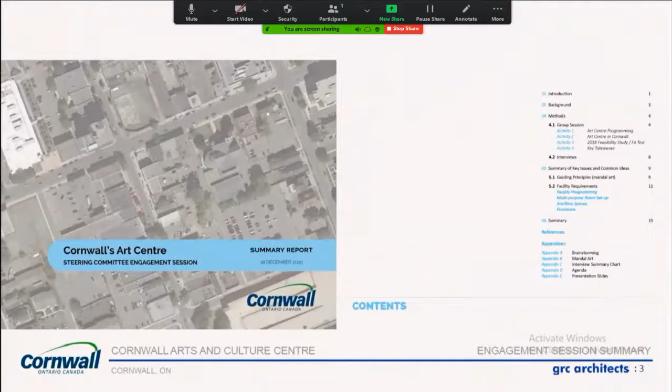So in December, our design team brought together the 12 members of the steering committee in a virtual engagement session to solicit feedback on the conceptual designs previously prepared and to establish a prioritized list of desired amenities. This feedback was collected in a report and informs the current program for the Arts and Culture Centre.

The group also contributed through an unstructured brainstorming activity that generated a comprehensive list of functions which the new center might be able to support. Then a series of small group interviews were held to help inform the requirements for each of these functions, the building requirements to support these functions.

The session concluded by asking participants to each list 3 key takeaways for the design team that will contribute to the success of the new Art Center.

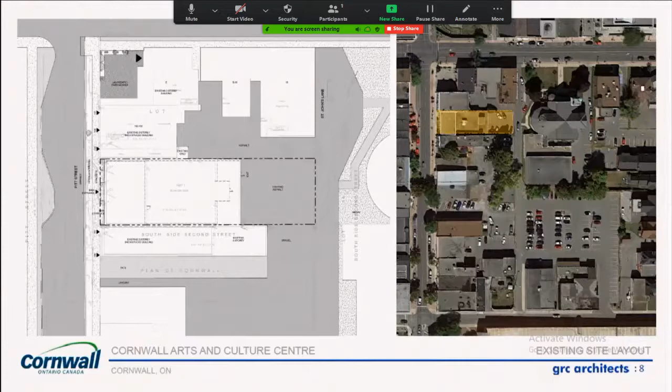Beyond that is a 1-story portion of the building with a new basement area below. The site slopes from Pitt Street up towards St. John's Lane, so we've indicated a loading ramp at the back, which would be used to access the new lowered floor level.

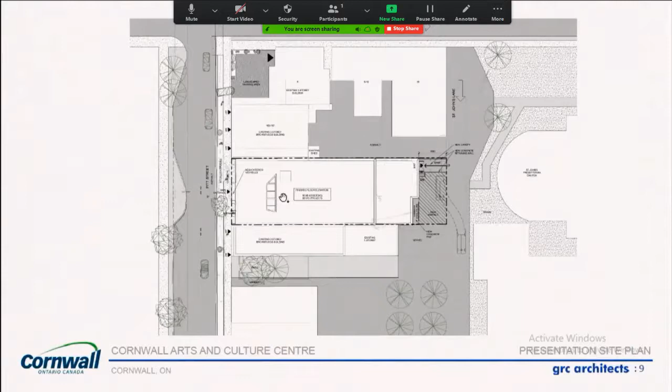Here we have the ground floor plan. You'd enter through a new glass portico that would replace the existing stone portico into an enclosed vestibule. Guests would arrive in a spacious foyer with over 13-foot ceilings as a result of dropping the floor level.

The designers and the committee members felt it was quite important to make this foyer large enough to support the patrons arriving and leaving from a performance, and encourage some socialization and lingering within the building. So we really pushed the design to make this foyer as welcoming and open as possible.

The dash line indicates an opening in the floor level above to create a sense of connection between the two levels.

Off the foyer, there is a flexible room that could be used to support functions in the foyer space, as well as be used as an office or touchdown space for facility staff. Beyond that is a washroom area with gender-neutral individual stalls with both toilet and sink fixture in each stall, a universal washroom, janitor room, and then around the other side we have an elevator to the second floor.

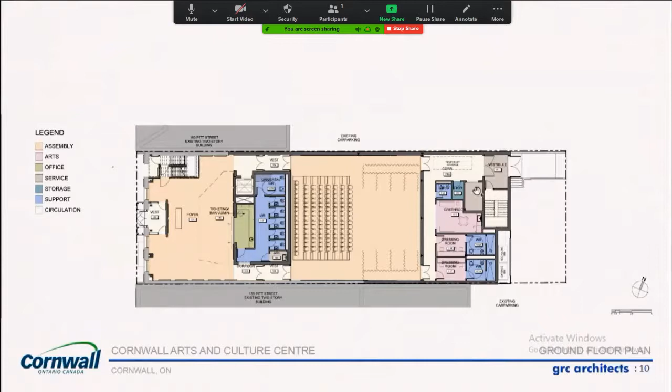The basement has been sized to the maximum extent allowable for a single exit. In this drawing, we've laid out storage for the chairs and risers, banquet tables, and a series of 10 by 10 cages along the back that could be used for potential rental opportunities in the community.

At the front of the building, this is the existing basement below the original two-story building. Over half of it is currently crawl space, and with the lowered floor level above, this would become unusable space and would be closed off. The remainder of it, the floor slab would be dropped to provide adequate headroom for the building service spaces in this area.

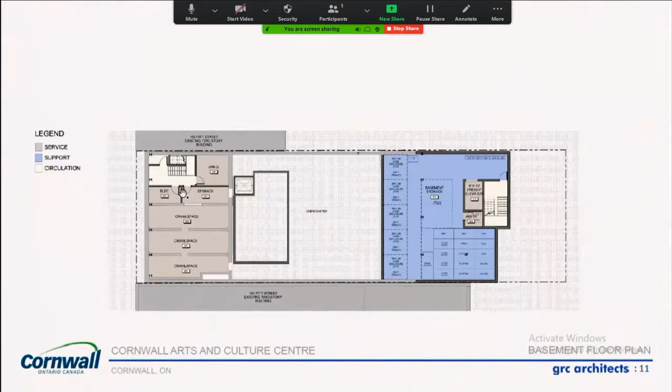On the second floor, you can see the large floor opening to below, providing a sense of spaciousness and connection on both levels. At the front, there are two studio spaces that can be combined by opening a movable partition. Individually, they're about 320 square feet.

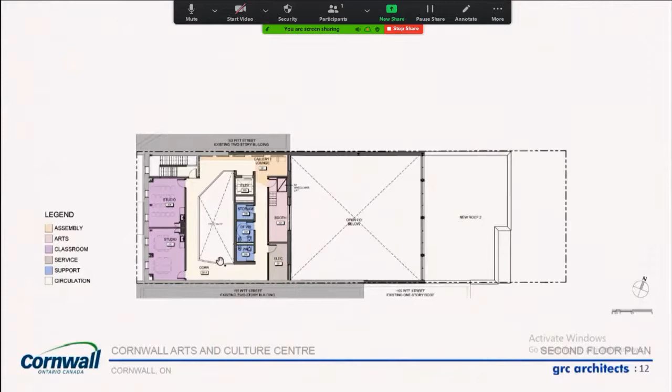Overall, the original second floor area is almost doubled in order to accommodate the location of the multipurpose room below, so we gain a bit of floor space on the second level. There's a production booth that overlooks the multipurpose room and an electrical room dedicated to the performance space. Also on this level, we have some washrooms to support the functions up here.

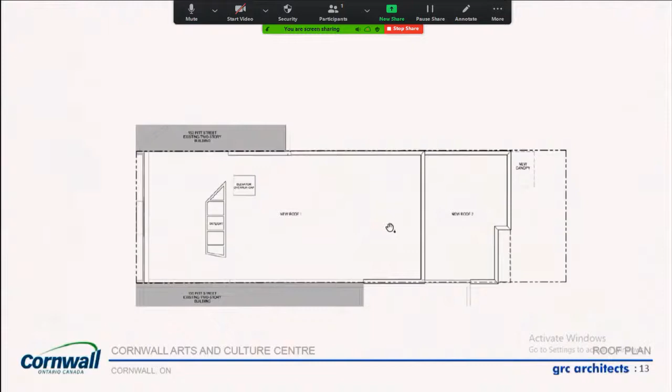On the roof, we've proposed a large skylight, that's what this is here, that would be located over that double height space, to bring natural light into the foyer. And we're also proposing glazing at the transition between this high roof level and the low roof level, with windows into the multipurpose room to provide some natural light into that space.

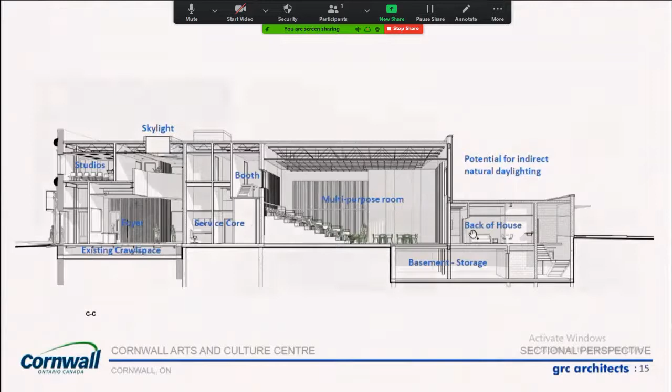An elevation of the St. John's Lane side of the building shows some of the other features I spoke about, the clerestory glazing into the multipurpose space, which you can see here in this view. We would provide closed secure garbage storage and access for moving equipment and sets into the building.

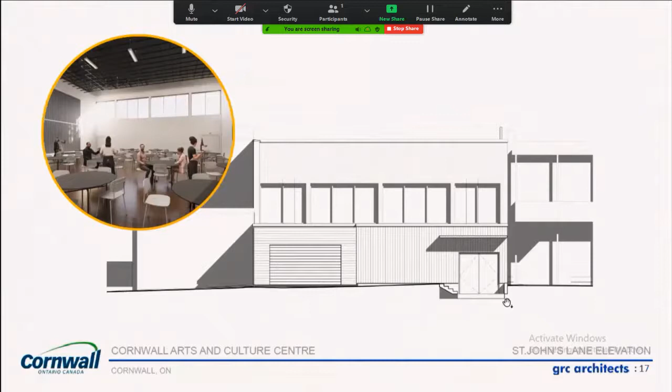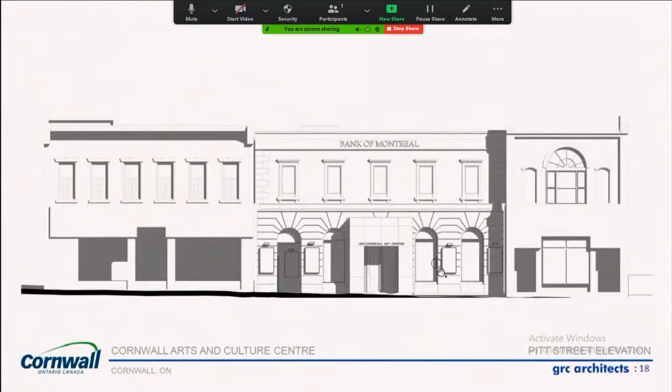The Pitt Street elevation shows some of the interventions at the stone facade that will give the building an updated presence on the streetscape. A transparent glass vestibule will signal the new identity as an arts and culture center, together with some poster boards and new lighting to animate the facade. We've also lowered the windowsills to enhance the relationship between the people on the street and the activities inside the building.

And finally, we have some exterior views during the day and with it illuminated in the evening.

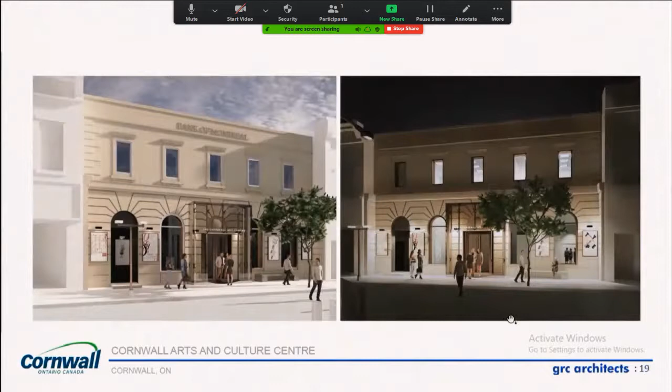Now I'll provide an overview of the Class C cost estimate for this work and compare it to the high-level numbers that you would have last seen for this project with the 2018 fit test report.

The Class C cost estimate includes new construction, including the fit-up of the theater space, which is often set aside as a separate budget for these projects. It includes site development and all of the areas of demolition proposed in the design we just saw. The demolition number also includes the work associated with designated substance removals.

The next few numbers, general requirements, design and pricing allowance, construction allowance, these are all to take into consideration some of the items of the budget that aren't represented on the drawings, like the contractor's costs, some further development of the design, and escalation.

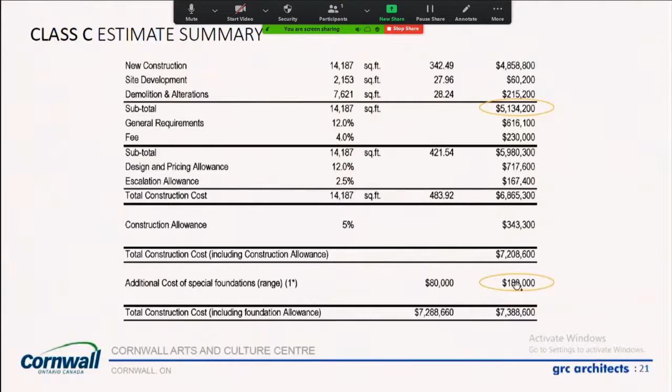I'd like to look at this first number in combination with this one: additional cost of special foundations. The geotechnical investigations have indicated that the soils in this area are quite poor, and there's going to be some cost associated with building on this site. The cost estimators have proposed a range of $80,000 to $180,000 for this work. We'd like to err on the side of caution and consider the high end of these numbers at this point in time.

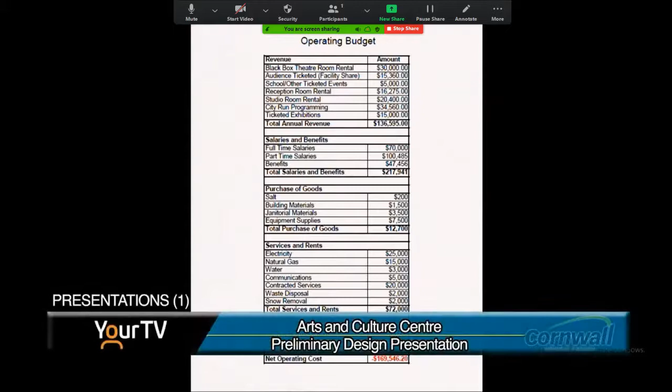Councillor McDonald: Thank you, Madam Mayor. I want to thank all of you for the presentation, it's truly exciting. I'd like to go through some of the points in greater detail, but since we ended on the last page, I guess I'll start there. So my questions are to you, Jamie.

Initially, when I look at these numbers, especially on the revenue side, I'm conscious that fees can be an effective lock on a door. Given that people will pay for the use they make of the building, I hope our fee structure is going to be open to as broad a participation as possible. I wonder if you can say anything about that.

For sure, through you, Madam Mayor. 100% right, we do not want cost to be a barrier to accessing the facility. Similar to our sports and recreation facilities, recovering the true cost is just not feasible, as it would be too high and result in the facility not getting used, which would be a real shame. So we've tried to develop rates where appropriate, looking at other similar sized, comparable facilities in Eastern Ontario, and we're typically on the low end of that spectrum compared to Ottawa and Kingston.

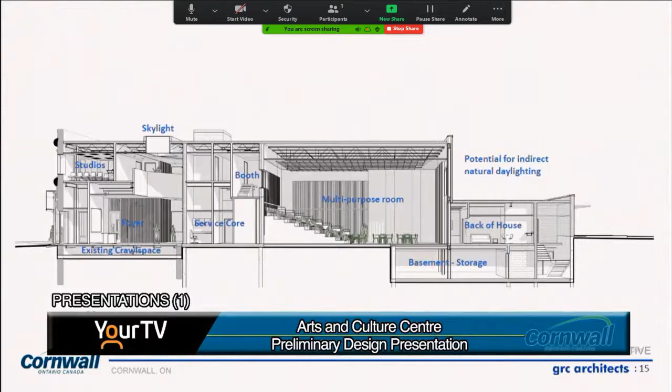Okay, well I agree with you, natural light is a really important factor if we can possibly accommodate it. But I'm wondering if the windows I've seen in a previous slide are going to conflict with the need for total darkness in a theater. Like a black box theater, all theaters have to be able to shut out light entirely — will this one be able to, in spite of the windows?

Through you, Madam Mayor, that is the intent. There are blackout blinds within a track that can fully block the light from the windows. We're confident that won't be an issue.

From the earlier research, the fact that this is a black box theater, we can accommodate that function through draping, through the blackouts on the windows. But the space will also function for other events, for banquets, for trade shows. We don't want to put any limitations on it, and the natural light will just enhance the environment for those sorts of things.

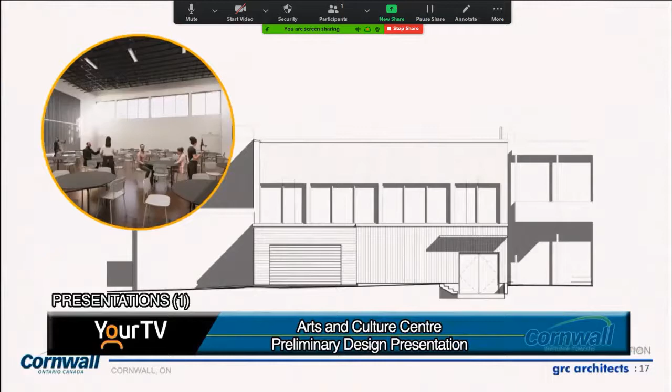That's great, so really I think we're getting the best of both worlds there in terms of blackout and illumination. So I think that's all the questions I have right now, Madam Mayor, but I might put my hand up again if I see something else.

It's a good thing you—it's International Women's Day. Am I right, eh?

Thank you, I have Councillor Hollingsworth next. Thank you, Your Worship. A couple of questions, perhaps to Mr. Fawthrop to start.

This 170,000, is that relatively firm, or sort of firm, or just you thought you needed to put some numbers in so you came up with your best guess? Through you, Madam Mayor, at this moment, no, this is a realistic estimate that we've come up with.

But I will qualify that a little bit to say it's not similar to the Benson Centre, where we were shutting down two rinks and relocating certain activities, so you could get a firm grasp on the type of activities taking place. With this facility, there isn't one that operates like it in Cornwall, so it's brand new, and we're trying to estimate or guess.

Through you, Madam Mayor, yes, we're proposing a small counter area and sink in each of the studio spaces, as well as on the ground floor in that kind of support space off of the foyer. We would like to have water access there as well to service any sort of catering that might happen in the space. Okay.

And then toward the front, there's currently a staircase to the basement and another staircase upstairs. The staircase, maybe not the same stairs, but it looks like the staircase is going to survive, eh? It's in your final design? Yes, through you, Madam Mayor. The stairs, we are proposing a bit of a modification to the configuration because we do have to go down to meet the revised floor level, and we don't want the stairs taking up more space than they have to. So they would be reconstructed, but would still provide stair access to the 2nd floor and the basement.

We'd also like to make a feature of them somewhat, bring some of that natural light in if possible. It's always nice to make the stairs visible to kind of encourage that use. Right, thank you, thank you.